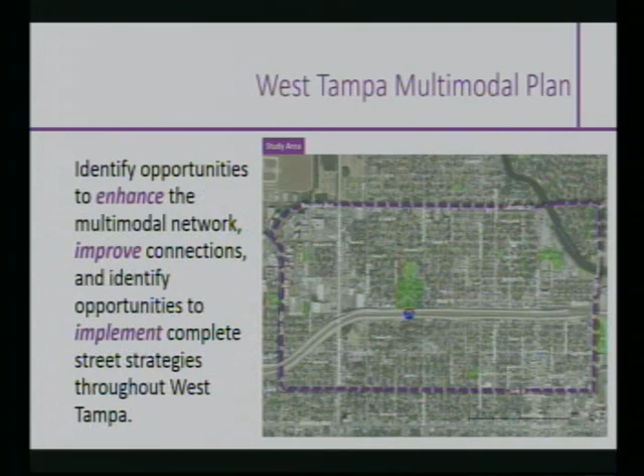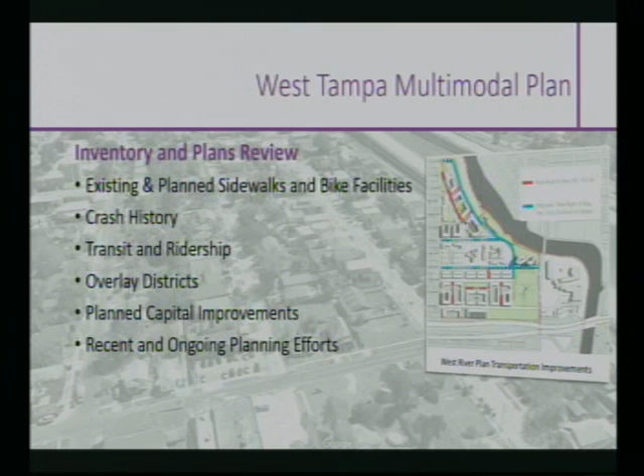So as with many plans and studies, the first thing we did was to identify the existing conditions to develop our inventory. There's been a lot of planning efforts, so truly trying to understand what has already happened. We don't want to reinvent the wheel, and we want to establish a good base to move off of.

So getting into our recommendations and into our safety and mobility enhancements, we looked at it in 2 ways: systemic enhancements and site-specific enhancements. Our systemic enhancements are things like making sure there are complete sidewalks, especially along major roads, dealing with drainage issues, lighting, especially at intersections and crosswalks. Are there additional crosswalk opportunities, traffic calming and speed management? Those general sort of basic things that we talk about when we talk about walkability and bikeability, and really encouraging—a lot of this stuff has already been set in action in our plans, but really encouraging that to move forward.

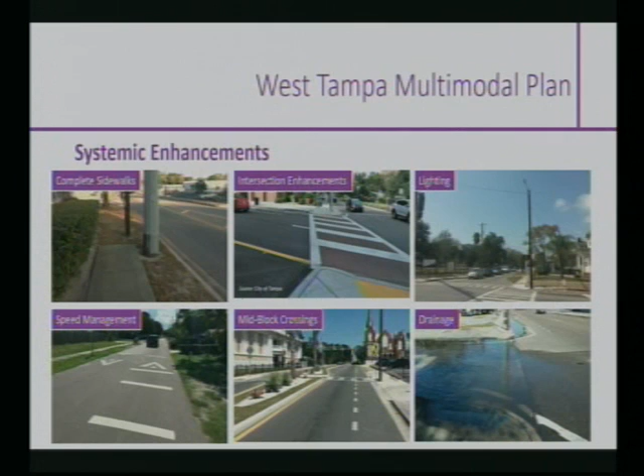Now, when we get into our site-specific enhancements, we looked at a couple different things: trail connections, complete street opportunities, and some opportunities for neighborhood greenways or bicycle boulevards.

So one of the first things we did was to look at how can we complete what is the I-275 Greenway. It may be a little hard to see on your screens, but there's some green lines there showing existing pieces of this I-275 Greenway. How can we make that connection through West Tampa?

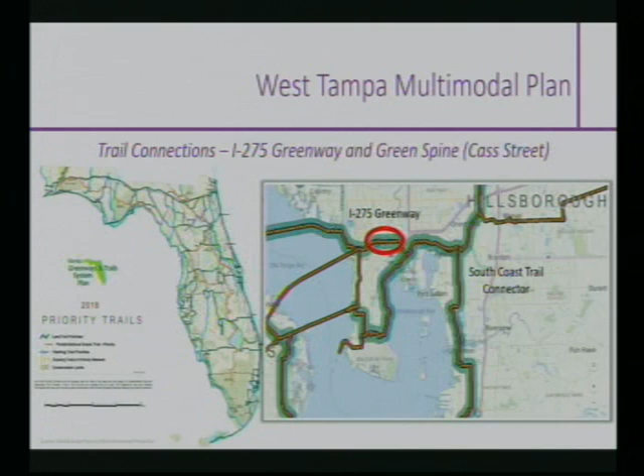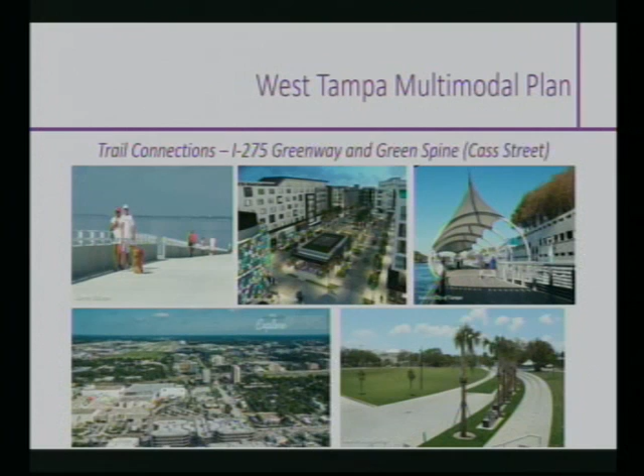And why do we want to do this? One, it's been identified regionally and statewide as a priority connection. The next presentation will connect to that with the South Coast Trail as well. It also provides more local connections to the Courtney Campbell—we talked about the sidewalk completion there—to West Shore as a whole, to the new Midtown redevelopment, to downtown, the Riverwalk, Julian B. Lane Park, and points beyond east and west.

So how do we make that connection? The study identified four potential alternatives. The first alternative really looks to utilize the existing right-of-way on the south side of the interstate and push the trail connection through there, utilizing that right-of-way and then some portions of LaSalle Street to make that connection from Himes Avenue over to North Boulevard, and then getting into downtown from there.

The next alternative, very similar, utilizes the right-of-way in LaSalle Street up to Rome Avenue, then takes advantage of some improvements the City of Tampa has planned for Rome, and also looks at the opportunity for a trail along the side of Rome Avenue to connect down to Cass Street, where the extended green spine is planned to go, providing that connection into downtown and over to Ybor and further east.

A third alternative, more conceptual, again utilizes portions of the right-of-way of the interstate, but then looks at a future opportunity to provide a connection from where the green spine is currently planned to end at Howard Avenue, and connect through north of the JCC and between the JCC and the Armory over to Armenia. Could you provide a connection via a cycle track on Armenia to get to Cass Street and that green spine, making that east-west connection?

Our fourth alternative looked at a northern option. Everything before was on the south side of the interstate. Are there opportunities to take the trail in this facility to the north? So we looked at going north along Main Street, with the potential for a trail connection down the middle of Main Street, similar to what the Pinellas Trail does through parts of Tarpon Springs and other parts of Pinellas County.

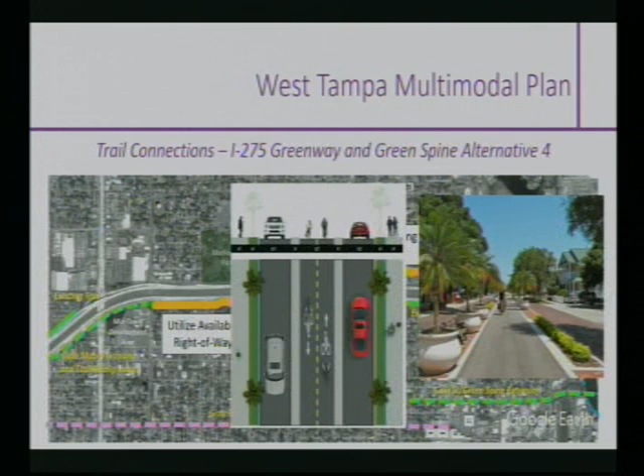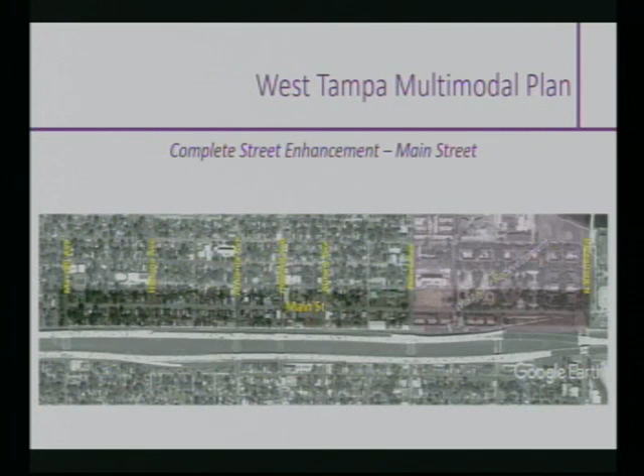Next, we looked at some complete street opportunities through West Tampa. The first was Main Street, from MacDill Avenue over to North Boulevard. Generally here we looked at how we can better define the roadway. Main Street is a main street by name, but also by the way it actually operates and feels. How can we better highlight Main Street as a main street?

There's 40 feet of pavement out there, and it has a really fast and wide feeling. So how can we better delineate and define that pavement? Can we do some intersection enhancements to improve crossings, help slow down and manage traffic? Are there opportunities for neighborhood traffic circles? Volumes and speeds are relatively low on this street, so could we do shared lane markings, lighting, and enhanced crosswalks? A quick example shows how, by defining on-street parking, providing shared lane markings, and some bulb-outs, we could better define the roadway itself.

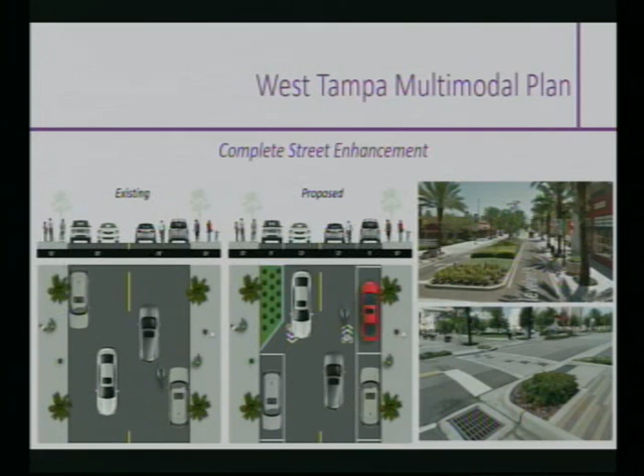The next corridor we looked at was Columbus Drive, from Lois Avenue to North Boulevard. Again, similar treatments: enhanced crossings, lighting, particularly intersection lighting, and intersection enhancements. For example, at MacDill Avenue there are permissive-only left turn lanes, so if you're trying to make a left, you never get a protected phase. Operationally, we could introduce a protected-permissive phase with a flashing yellow arrow to help with those turning movements, along with wider sidewalks, especially on the west side of the corridor, where Columbus Drive is a very big, large, fast road with a lot of traffic.

Something first identified in phase 1 of the walk-bike plans was flagged to look at further in the future, and that's what we did here: the potential for lane elimination or a road diet on Columbus Drive between Rome Avenue and North Boulevard.

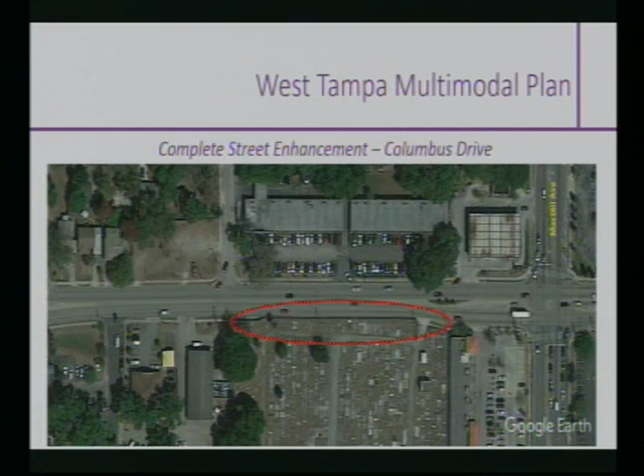I talked about wider sidewalks. One of the challenges just west of MacDill Avenue on the south side of Columbus by the cemetery is that the current sidewalk there is at best 3 feet wide. So one of the things we wanted to look at is whether there's an opportunity to provide at least a minimum 5-foot sidewalk, an accessible pathway through here.

Widening to the south isn't feasible because of the cemetery. So we looked at the existing pavement width and existing lane widths out there. At 12-foot lane widths, we thought that if we could take a foot from each lane and go down to 11-foot wide lanes, we'd have 4 extra feet to give to the sidewalk on the south side, moving the curb out to create a 7-foot sidewalk, a 7-foot pathway for pedestrians to cross or walk along this section of Columbus Drive.

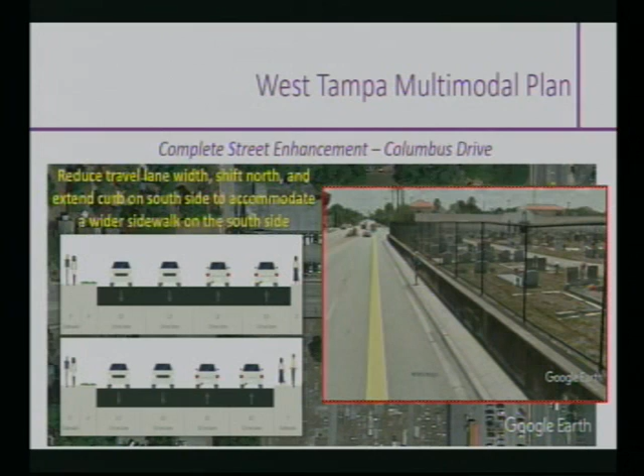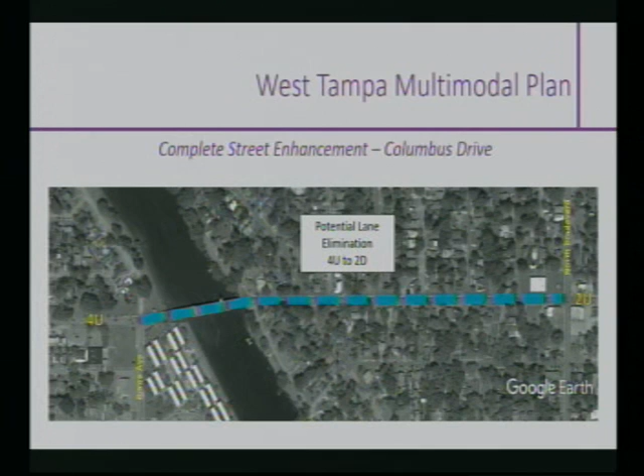I talked about the potential for a road diet. To the east of North Boulevard, Columbus Drive is a 2-lane divided road. To the west, it's a 4-lane road today, but traffic volumes between Rome and North Boulevard are significantly lower than west of Rome Avenue. Also, the current width of Columbus Drive is very narrow; at parts we have about 9-foot travel lanes, which are very tight.

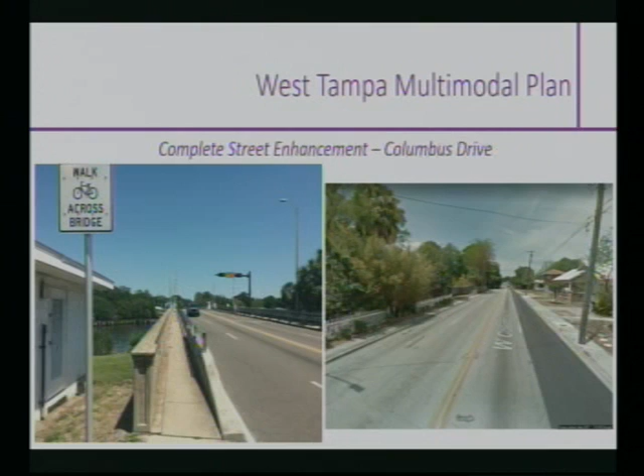It also gives us an opportunity to do some enhancements at the intersection of Rome Avenue and Columbus Drive. We looked at the potential for a signalized intersection and a roundabout at that location.

And then Howard and Armenia. Again, it's a one-way pair, especially Armenia Avenue, which has a lot of pavement out there and high speeds. So we're looking at things like intersection bulb-outs and bulb-outs along the corridor to help define the on-street parking area, help with speed management, enhance the crosswalks, lighting, and opportunities to provide bicycle facilities. North of Columbus, the county, through the last resurfacing project, provided buffered bicycle lanes in coordination with the city. Are there opportunities to continue that as we move south into our study area?

Lastly, we looked at neighborhood greenways. These are often called bicycle boulevards or neighborhood bikeways. The idea is how we can take more localized local streets and give bicyclists a little more priority through things like pavement markings, signage, and traffic calming.

The first one we looked at was Gray Street. In this one we went from West Shore over to Rome Avenue. One unique thing about Gray Street is that it already has a signalized intersection at West Shore Boulevard and Dale Mabry Highway, and is already kind of informally used as a neighborhood greenway today. So the recommendations here are really pavement markings, some intersection enhancements to help people get across intersections such as MacDill Avenue and Howard and Armenia, and really highlighting the street as a bicycle priority, pedestrian-friendly street.

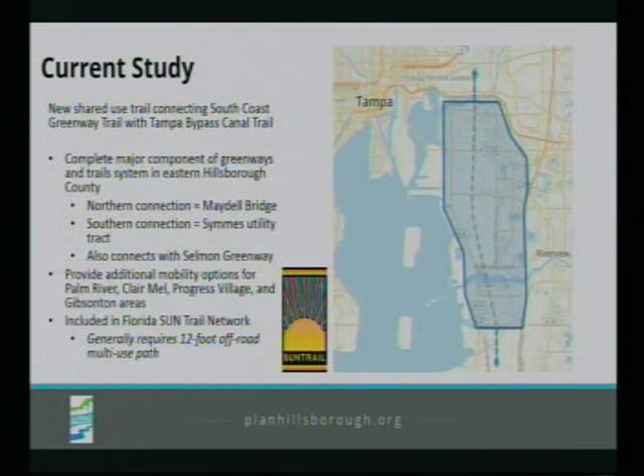What we focused on was the northern connection at Maydell Bridge, down to the utility tract at Symmes Road, noting that this would connect with the Selmon Greenway and so on, providing additional mobility options for some of the communities in the area. In order for it to be eligible for Sun Trail funds, since this is part of that Sun Trail network, the general premise is that you need a 12-foot multi-use off-road path. So that's what we were looking to delineate.

Our task was to look at different alignments, do an evaluation, go out to the public and the community, come back and do some conceptual alignment analysis and cost estimating. We held 2 meetings in early April, sent out over 10,000 of these postcard flyers, and got pretty good attendance at the 2 meetings. There was an additional meeting held in June at the request of the county for more detail regarding one of our alignments, and I'll go into that in just a minute.

What we asked people at the meeting: we gave them some images, for example, of trails along a major road, trails along a power line, trails that might have been along a creek, and trails along a local smaller road.

None of those images were from Tampa, Hillsborough County, so they didn't mix into their perception of something. We also asked people where they would generally prefer to see a trail, and you can see that division in the pie chart.

We also asked about amenities and what were the important things they'd like to see on the trail. Overpasses over major roads came out pretty high, as did amenities like benches, water fountains, and lighting.

As we started getting into the trail study, we divided it. It's 8 miles north to south, but our trail meanders a bit so it ends up closer to 11, which you'll see in a minute. We looked at dividing it into three sectors: the northern, central, and southern sections. A lot of the detail alignment differences happen in the north, so we'll dive right into that.

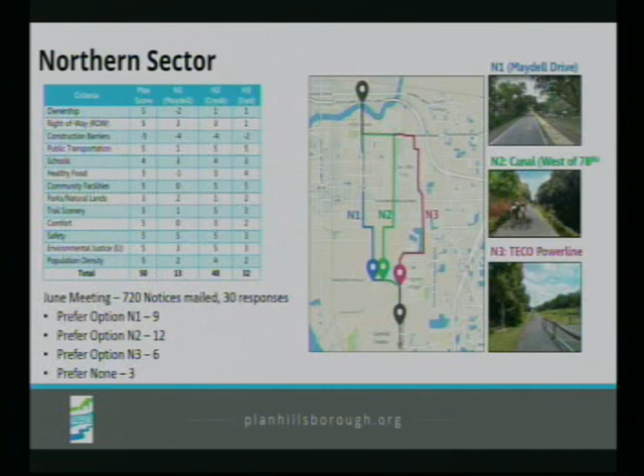N3 was added during the study as a result of discussions with the county. As a result, we had a separate meeting in June and sent out 720 notices to people living directly along these alignments. The MPO got 30 responses back, and you can see people's preference was generally N2 slightly higher than N1, with N3 lower.

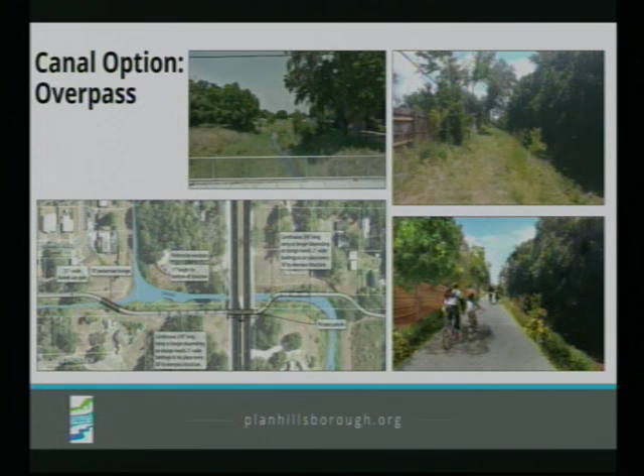As the canal goes underneath Causeway Boulevard, we have some challenges getting across. One idea was to do an overpass, so we put a sketch together, did some cost estimates, and looked at it. It also helps with right-of-way issues and lets us meander while elevated.

But a lower cost option would be to go at grade. The only challenge is that along Causeway on the sidewalk portion, we cannot get 12 feet. There is ability to do less than 12 feet in short segments within Suntrail if you have good reason for it.

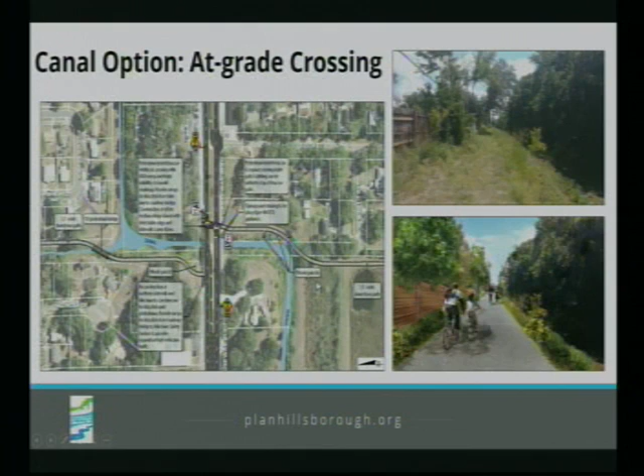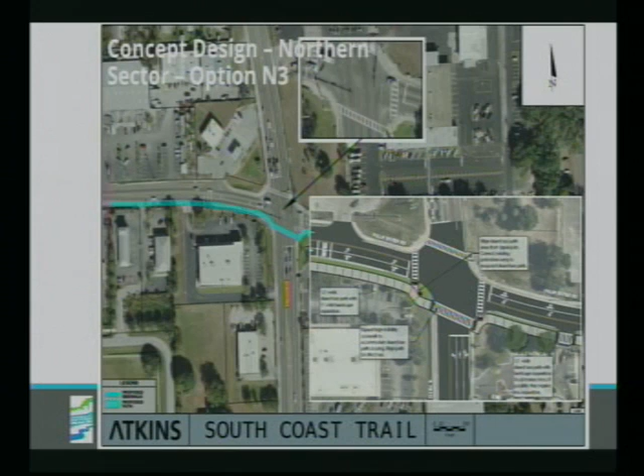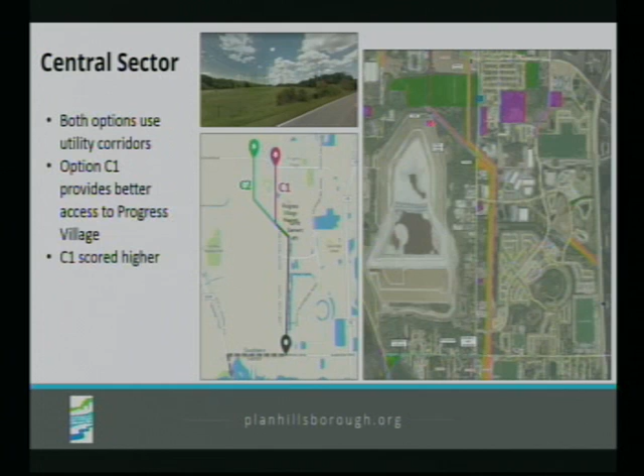In the central corridor, both options use the utility alignments. Option C1 provides slightly better access to Progress Village, and as a result it scored a little higher. What you see here are our CAD drawings.

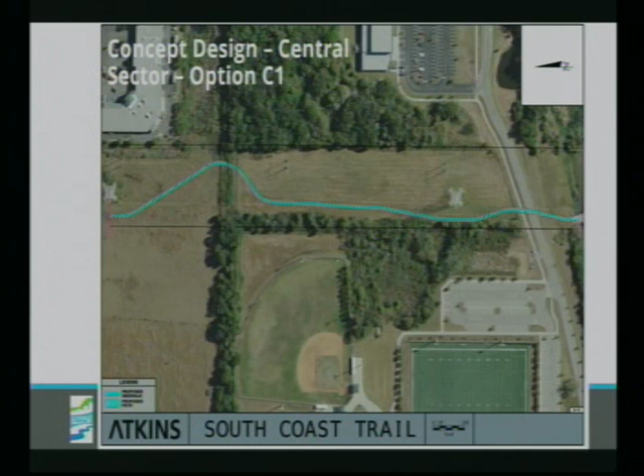I've got a couple of these in the presentation, and there are a whole bunch more in the appendices to the report. You can see it comes through between the community facility and the recreation fields—perfect access and an opportunity for linkages there.

As we move south, we have two fairly large constraints: the Alafia River and a smaller one at Bullfrog Creek. No matter what we do, we have an Alafia River constraint unless we punch all the way through, which would mean a new, very tall bridge over the Alafia—and it was determined very early on we probably wouldn't go that route.

There are plans for FDOT to replace the Alafia River Bridge as part of a PD&E where they're going to widen US 41, and that bridge would have a multi-use trail component. So in any of the alternatives, we've assumed we're coming out to US 41.

Then there's a difference of alignment. S1 basically follows US 41 all the way down to Sims, whereas alignment S2 would go back over to the utility corridor and cross Bullfrog Creek. Within S1, there is some discussion, and we went back and looked a little bit at the Lula Street option, which is something that had been identified years ago.

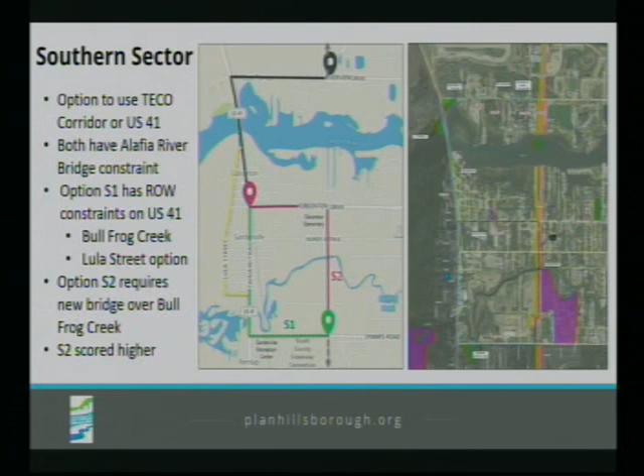It's a very small local street that also would have some right-of-way questions and concerns. At the end of the day, option S2 requires a new bridge over Bullfrog Creek, but so does S1, because the bridge that's over Bullfrog Creek right now has a sidewalk that may be as wide as this podium, probably not even. At the end of the day, S2 scored a little bit higher.

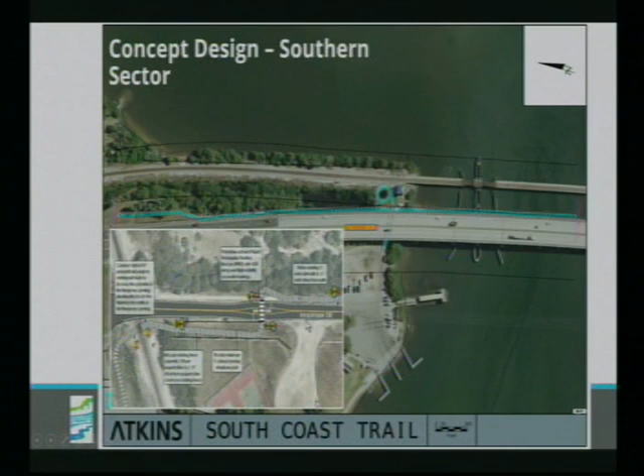Some of the CAD renderings again show the multi-use trail along the existing bridge, but this would potentially be on a new bridge, with an opportunity for a little connection loop down below that would allow you to connect the two parks as good trailheads on either side. And then where it crosses Riverview Drive, with a good mid-block crossing that keeps us away from the train tracks. We're able to do that at Riverview.

In some of the other sections, we're going to be closer to the railroad tracks and bring it in together with the signal. If we do the Bullfrog Creek S2 alignment, when we're crossing the creek, we're talking about 100 feet, maybe the bridge span would be up to 150 feet long. Again, this would be a connection through the utility, which would bring you down to Sims Road where it already is aligning with TECO.

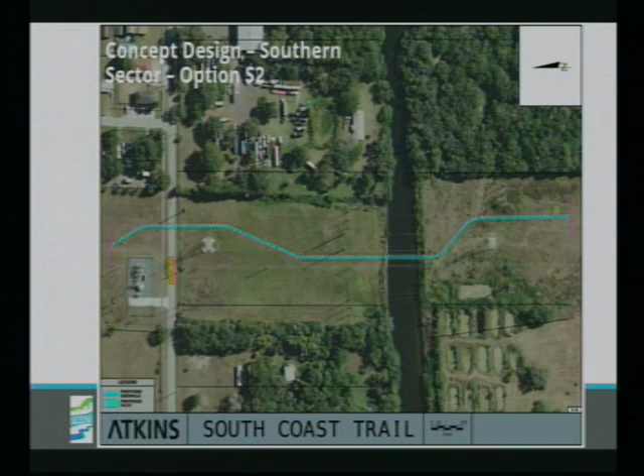I did fail to mention that a lot of the stuff that we're assuming here with TECO is based on work that the county's doing right now, trying to get an agreement with TECO for use of their corridor south, and then it would assume that it would be able to continue further north.

In summary, the cost estimates are fairly similar. If you go with the northern alignment that follows the canal with an overpass, you're talking about $13.5 million. If you go at grade, we're about $11.5 million, so that tells you the overpass is about $2 million. And if we went to the N3 alignment, which is the power line, it's a little bit longer overall, but the cost would come down slightly to $11.3 million.

At the end of the day, we did not do detailed analysis of N1 because Maydale Drive scored low. The reality is, in order to get a trail through there, we would have to move the entire road for several miles to either the left or right and rebuild. So that didn't carry forward.

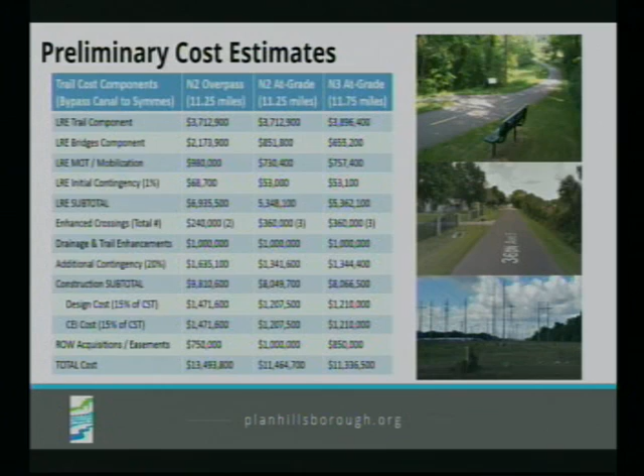Thank you for this really good report. And the citizens in South County really want the South Coast Trail Trail. So anything we can do to help move it along as quickly as possible would be great.

Well, again, the county has the PD&E study for the segment to the south. Our goal when we were finishing this is it then gets transmitted back to the county, and they do the prioritization of the next steps, which might be a PD&E for this segment. I think it's on the TIP. So once we get these studies done, that's the problem. That's what holds it up.

Yeah, it's like every section requires a study, and then that's 2 years. Then we have to get it on the TIP. Then that's another couple years to get that funded. So I don't know that we want to wait 10 years to get this trail done. So anything we can do to expedite would be very helpful.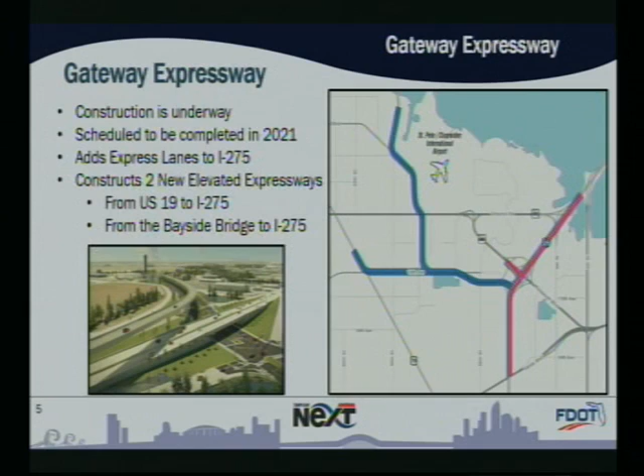The Gateway Expressway, if you've been down to Pinellas County recently, you may have seen we started work in the Pinellas Gateway area on the Gateway Express project. That project will be completed in 2021. Basically, it adds express lanes to I-275 and also constructs 2 new elevated expressway connections between US 19 to I-275 and from the Bayside Bridge to I-275. So that is under construction, and we have about 2.5 to 3 more years before that'll be completed.

The Howard Frankland Bridge, we have an industry forum this month where proposers interested in putting together design-build proposals to go after this project will come in and we'll tell them about our plans. You've probably seen some of the press recently about what is included and what's not included on the bridge. I will tell you that over the last year or so, we have added a number of features to the bridge to make sure it can accommodate any future plans that may involve other modes of transportation, including providing a portion of the bridge that will be constructed strong enough to hold up to light rail, should that ever become a reality in the region.

It could be on that bridge. We're also making sure that if we ever decide to do a bus rapid transit system across the bridge that would require its own lane, we'd have the adequate width to do that. Our initial plans would be to look at doing that in an express lane, but there has been some concern expressed to us about what happens if the express lanes don't work and the buses are stuck in traffic. We could restripe the lane given the current RFP requirements, and we'd be able to include that as its own lane for the bus.

And of course, we also added, at the request of many agencies, the bicycle and pedestrian facility that will be separated from the traffic. It won't be next to it like a bike lane - it'll be its own bridge next to it that will allow for interconnection between the 2 counties for bicycles and pedestrians.

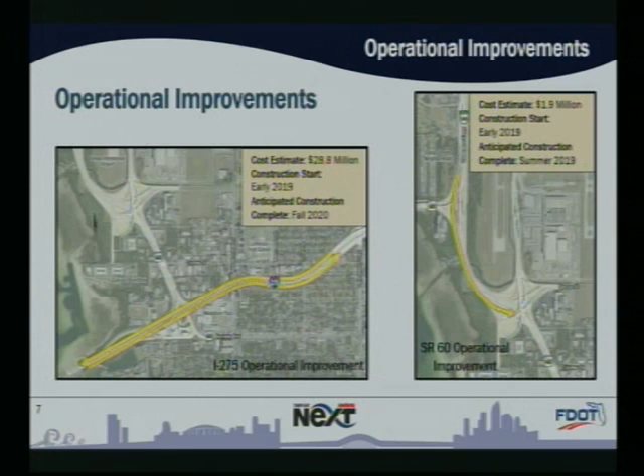We're also going to be significantly lengthening the merge area for the loop ramp traffic. If you've come from the airport to go northbound on 275, you get in that loop ramp and you'll notice you have to merge over right away - there's not a whole lot of room. That's a major congestion point as well as a crash history problem. We're going to extend that about 1 mile to the north, which should hopefully allow for a much smoother weave and merge. Those 2 projects, I think, will provide a lot of near-term relief as we wait for the longer-term projects.

Wanted to talk briefly about the I-275 North Corridor. I'm sure you all know that within the last year or so, we decided that we were going to remove express lanes from consideration in that segment. We did that for a couple reasons. One was the community made some good arguments about the impacts we would be having, especially the right-of-way impacts and how that would affect the community. We also looked at the potential of using I-75 as an express lane corridor to go north-south as opposed to using this portion of I-275.

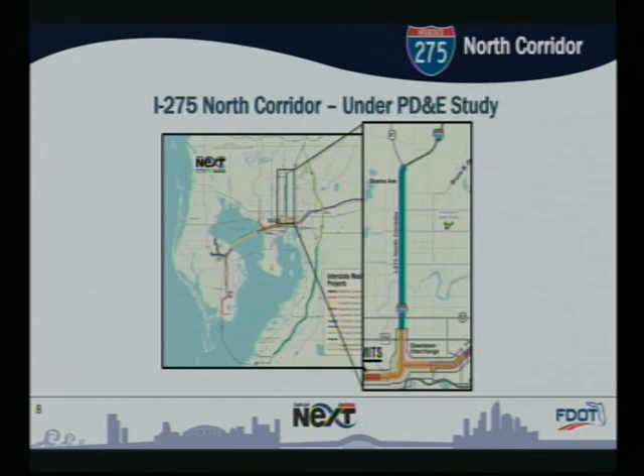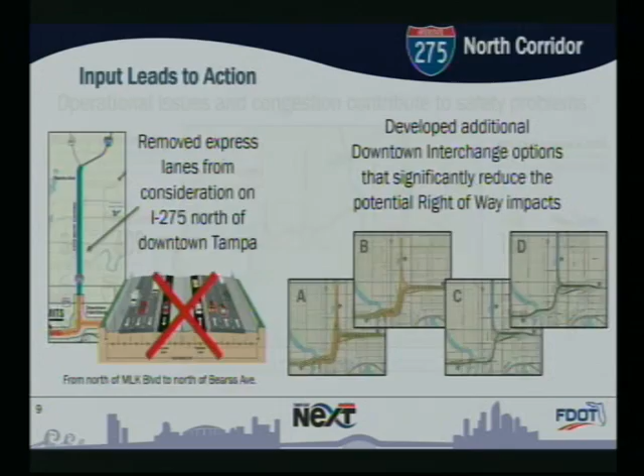That was something we agreed to, but we also looked at the downtown interchange and asked, can we reduce some of the impacts there? We've reduced the right-of-way in that area, and depending on the option chosen, we could see significantly reduced right-of-way compared to the previous Tampa Bay Express projects. But that doesn't remove the fact that we've got a huge problem on the segment of I-275 north of I-4.

This graph is what they call a heat map. It shows the frequency of crashes in a certain area, and the red shows where the really bad areas are. You can see two areas that really stick out in the region: one is I-275 north of Interstate 4, and the other is down in the West Shore interchange. Some of the numbers are pretty significant. In 2016 alone, there were about 1,000 crashes in the area of the West Shore interchange, and over 1,500 on the segment of I-275 up near I-4.

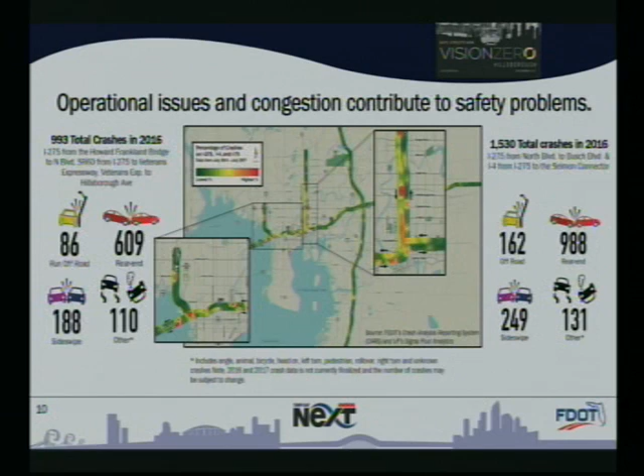So we want to do something. We have to do something to try to improve that. These areas are also included in the MPO's plans for areas we looked to for safety.

So what are we looking at? We are investigating a project that would all be within the existing right-of-way, so again, there's no need for any additional right-of-way in this area. The project we're evaluating now would allow us to address safety and congestion along the corridor by adding a non-tolled general purpose lane within the existing right-of-way—not everywhere, but in areas where we need to help move traffic and reduce conflict points, similar to the one you see coming southbound on 275 to go to I-4.

We're also going to use this opportunity to enhance pedestrian and bicycle connections. We're going to look to improve some of the interchanges that have operational problems, and also provide opportunities for transit—all again within the existing right-of-way.

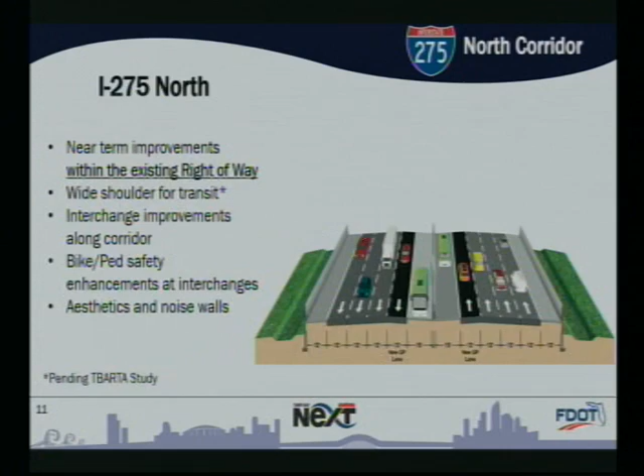One of the things we continually hear is that getting underneath the interstate in this area is not a fun thing to do. It's not aesthetically pleasing, and it's not safe in some areas for many people, and they want us to look at improvements. So some of the things we're going to look to do as part of this project is widen our sidewalks through that area, enhance lighting, and paint the bridge substructure to make it more aesthetically pleasing. As you probably see in a lot of those places, we have sloped walls that come down to hold up the bridge. We're looking at cutting those back to make them straight up and down so we can fit more room underneath for things like bicycle paths and pedestrian paths.

We're open to doing things like public art—that's something folks have asked us to look at—and also landscaping. That's all stuff that we can do within this project.

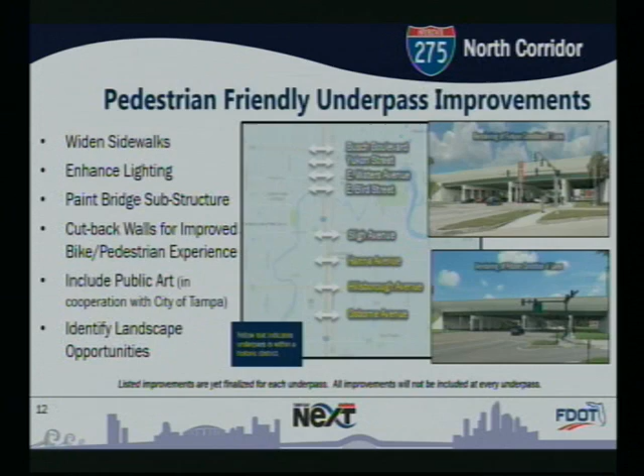The other thing we can do with this project is complete the sound walls through the corridor. This will allow us to go into the areas that don't currently have sound walls and put them in, working with the community to make them as aesthetically pleasing as possible, getting them involved in the design—where it would go, how it would look. All of that would hopefully be something the community would see as an asset.

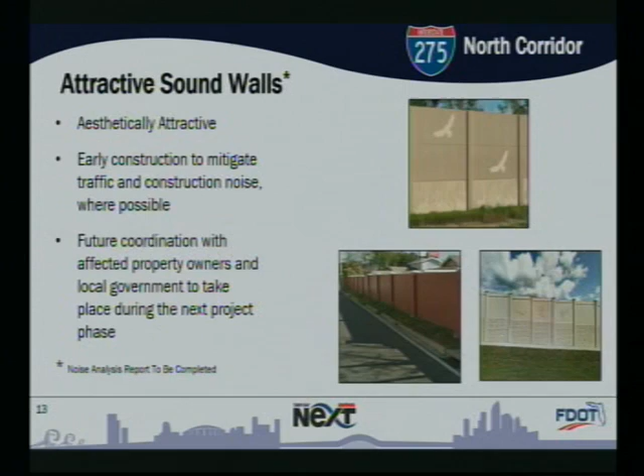We're also looking to make sure that everybody who's been involved so far in the Tampa Bay Next process continues to be involved in this next phase, which would be more of an operational improvement, but something we would do to improve near-term conditions as much as possible within the existing right-of-way. Of course there are lots of landscape opportunities—we build landscaping into our projects, so we would do that in this area.

Now, the Westshore interchange—many of you know that at one time a large portion of this interchange was funded in the work program.

When we re-entered the SEIS, we had that most of that money removed. So we're now looking for ways, as the SEIS comes to fruition, to bring that project back into the work program. The Westshore interchange area, as opposed to the downtown interchange area, has always seemed to have a lot more support and is less controversial.

We own most of the right-of-way already. There's a few pockets that we would have to buy. But this project would provide a lot of things that are going to be badly needed, especially after Gateway and Howard Franklin are completed. It would provide direct express lane connection to the Tampa International Airport, also have a dedicated ramp from Kennedy Boulevard to the airport. It would connect to the veterans. It provides a lot of connections that really are at the hub of this whole system.

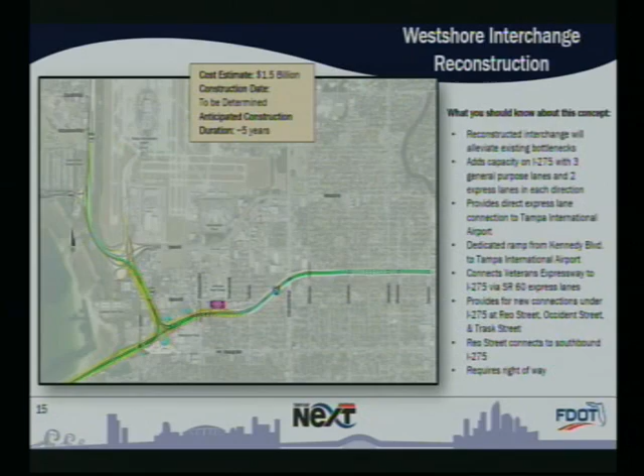So that's the project we're really hoping to try to get money for. That's SIS money that's programmed at the central office statewide level. So we're making our case to try to get that, and we're hopeful the community is going to be supportive of that. Of course, as part of that, we've received a lot of input about local connections and aesthetics. How do we reconnect some of the roads, take the traffic off of some of the roads that are currently over capacity, distribute it out more?

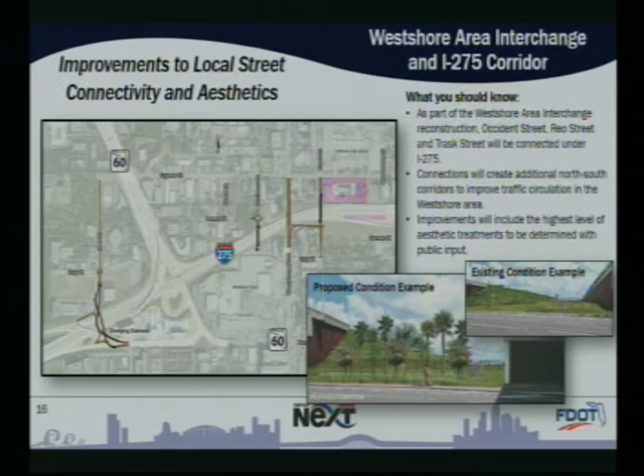So we're looking at a number of things. Occident Street, Reo Street, Trask Street would all be connected or reconnected under I-275. We'll also be creating additional north-south corridors to move some traffic in that area. And then we also are looking to do a high level of aesthetic treatment for that area.

So where are we in the process? Right now, we're in the period between when we did our first public workshop and when we do our second public workshop. And that's where we prepare the majority of our documents that have to go to Federal Highway for their review and ultimately, hopefully, approval of an SEIS.

So we're going through that in December. We'll go out to the public with what we have as far as those documents and the recommendations to go forward. And then as we go past that workshop, we'll go into next summer where we'll have the public hearing. And at that point, hopefully the SEIS will be completed and we'll know what direction we're taking.

We do have a lot of upcoming outreach meetings. Many of you see them all throughout your areas. We continue to do that. We will have two SEIS public workshops. The first one will be December 10th. The second one will be December 13th. Our next update to you will be prior to those workshops.

I don't want to end before the presentation before I take a minute to mention transit. And I know Ming Gao is scheduled to talk to the committees as well as to the board soon on our multimodal center study, as well as a number of the other transit initiatives that we're funding the studies for. So I'm not going to talk in a lot of details, but I did want to reiterate again, FDOT stands ready to be a partner with you on transit.

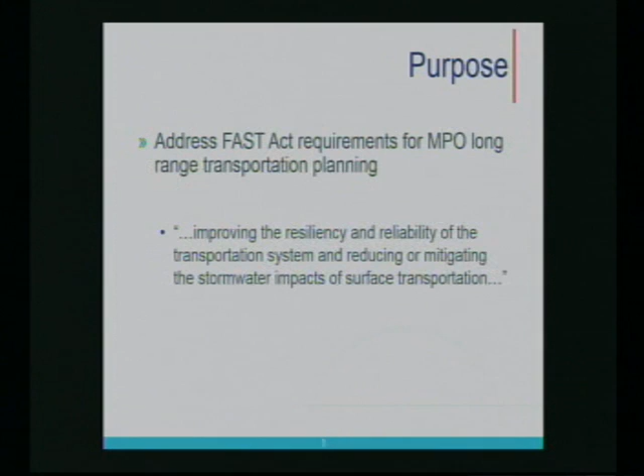Just a little background - I think you probably know this better than me: 2.8 million people, with another million anticipated in the Tampa Bay region by 2045, 1,000 miles of shoreline with 39% of the population in flood zones, and I'm not even counting the barrier islands. So what the whole region is looking to do is, as we update our LRTPs, incorporate that data. We're also working closely with hazard mitigation, emergency management, and public works to see if we can put that information into the hazard mitigation plans as well.

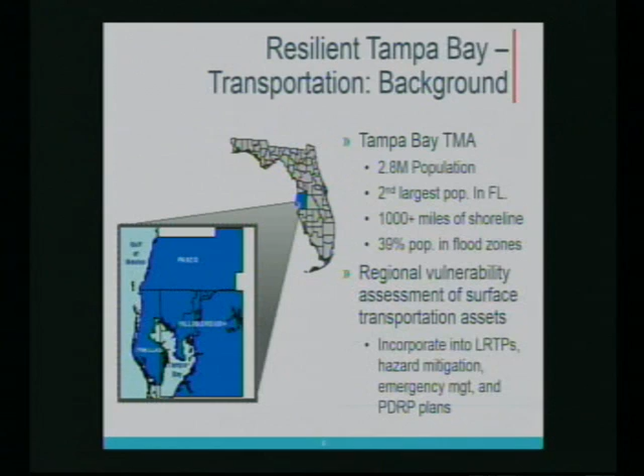I want you to know that as we start this process, which officially kicked off at the beginning of August, we're not working in a vacuum. We are coordinating with the Regional Planning Council and local governments. For example, in Hillsborough County, the county is doing a Peril of Floods matrix, and we're coordinating with Dr. Bond at USF to work on that. We're feeding this information directly into their report as they need it. That's what's going on. We'll be back with more updates on this project.